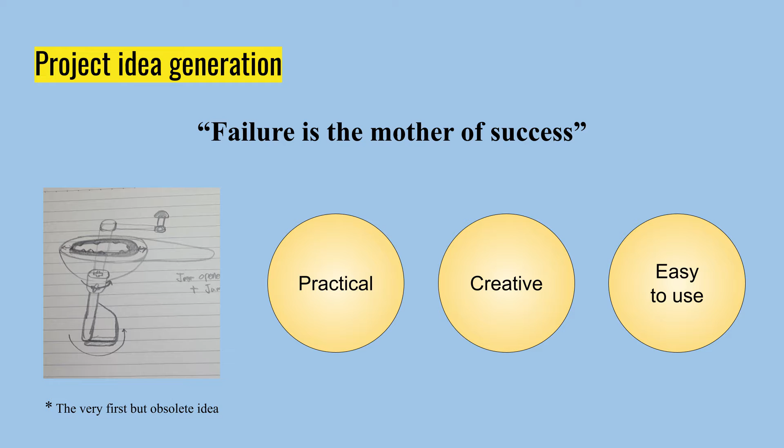Today we are going to show you the final version of our sensational item. Like the famous saying in the slide, we've learned 3 important lessons from the first try. The product should be not only useful but creative to attract people's interest and end up with the purchase. Also, it is best to invent new items which are easy to use in daily life. We assessed that the first presentation in the logo contest was a great turning point for us to improve our project to a much better item.

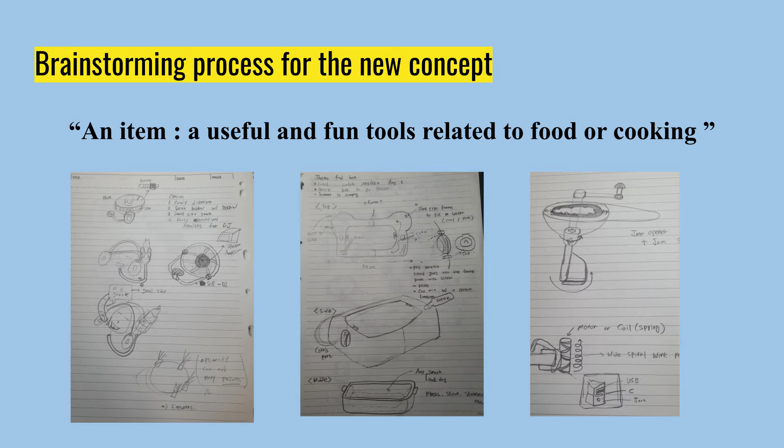In order to create the initial concept of the project, we narrowed down the common subject as to design useful and fun tools related to food. And then we had brainstorming without any limitations to generate as many ideas as we can. There are some interesting productions in the slides, as you can see. The final decision was a cooking multi-tool like you can see in the picture on the left side.

During the decision-making process, we had another discussion about what product will be the final concept among many creative ideas. So we made a few metrics to narrow down the top 5 ideas and evaluated each item. Using a few metrics really helped us to make the logical and reasonable decision.

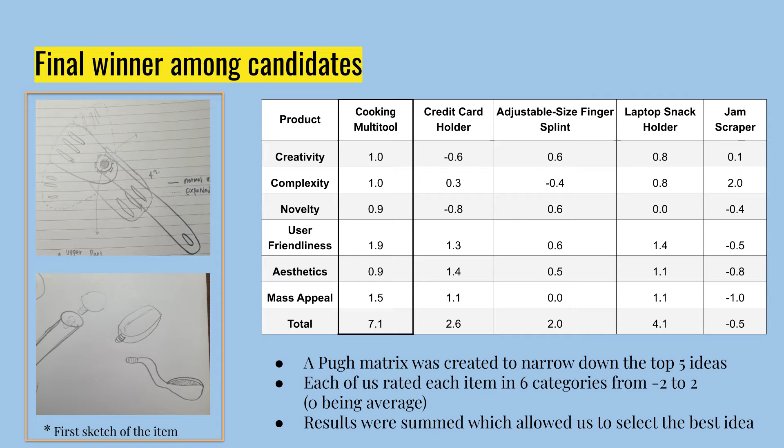The idea about the multi-tool was motivated by 2 stories. The first one is that one of my friends always had difficulty flipping heavy or large and wide food on the frying pan, like omelets and pancakes, with a normal spatula. From this, we thought about the changeable size of the spatula.

The second one is that sometimes moms or chefs need to cook many dishes at the same time, which makes them hectic. So an interchangeable handle that has multiple tools in one rod saves space and helps users not to waste time finding the tools they need. That's how we were able to come up with the concept of the multi-tool.

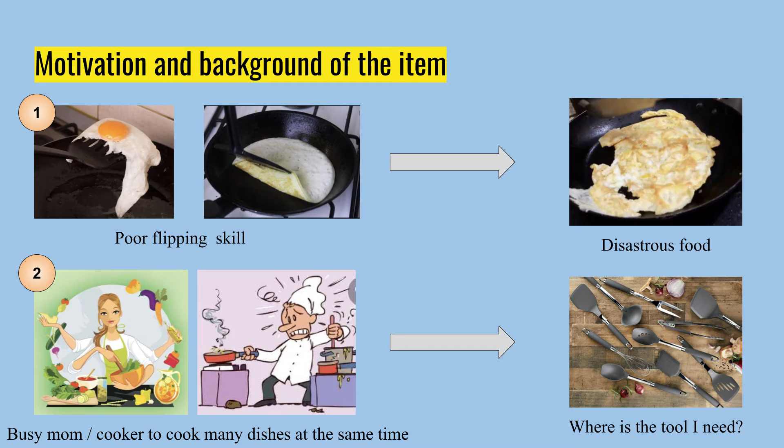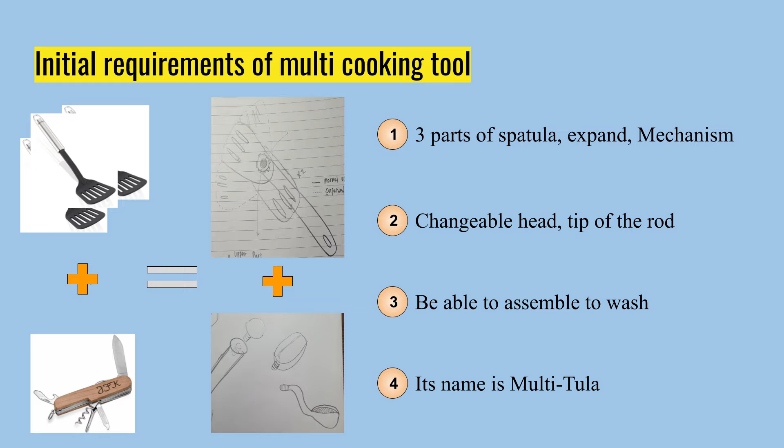Before we jump into the real CAD design, we made some requirements for our item. The spatula functioning part should be expandable to have a wide surface mode, which is operated by a certain mechanism, and the rod needs to be designed to attach other cooking tools. Also, to make the tool washable, it should be assembled with some other parts. Lastly, we named the tool Multi-Tula.

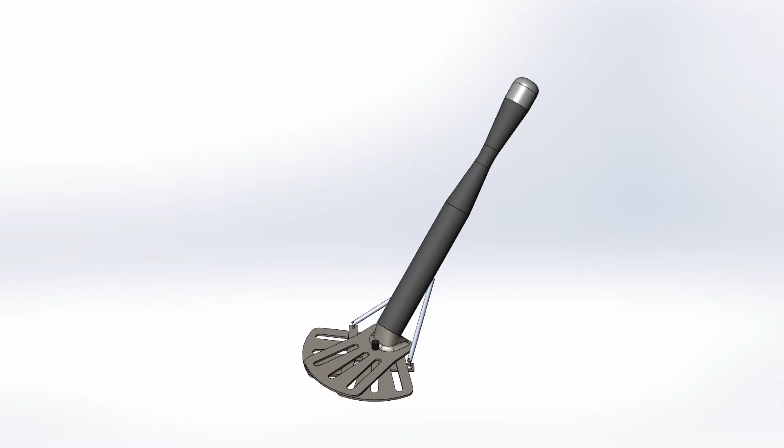Going into this project, there were a lot of ideas that had to be realized. Our main design goals were to create utensils that saved space by using an interchangeable handle. We decided to make 2 tools. One was a spatula that had the ability to change its size, and one was a spoon with holes in it. Additionally, caps were created to protect the threads on the handle when they're not in use. Our design consisted of distinct sections: the handle, the 2 caps, the slotted spoon, and the spatula, which was the most complicated part by far.

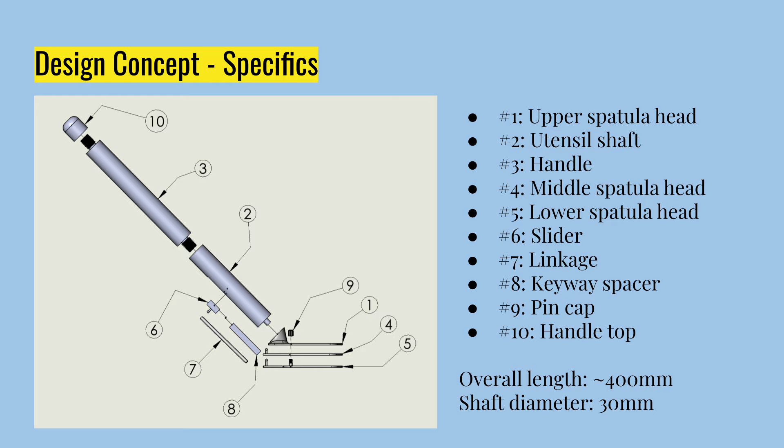This figure shows the parts making up the spatula in an exploded state. We have the upper spatula head, the utensil shaft, the middle spatula head, the lower spatula head, the slider, the linkages, the keyway spacer, and the pin cap. Part 3 is the handle, and Part 10 is the handle top, but these were designed after the first printing cycle. Now we will discuss the functionality of each part.

The shaft is 30 mm in diameter and 150 mm in length. It has a long keyway running through the center where the slider and the keyway spacer sit. The top end of the shaft has a female thread where the handle screws into it. On the opposite end, there are two pins that are press fit into the upper spatula head.

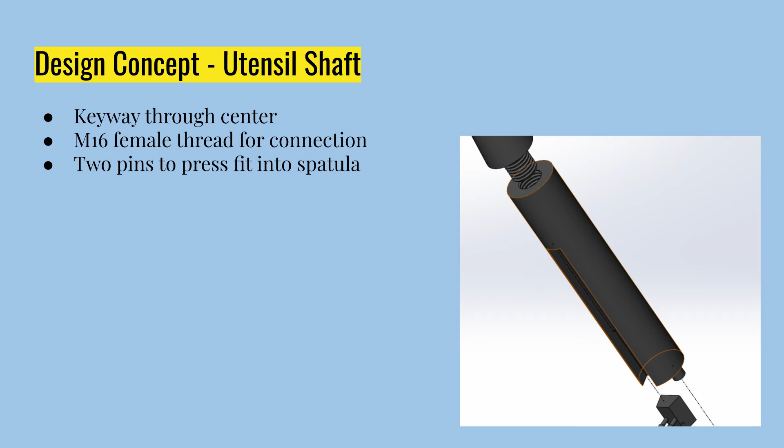As for the spatula itself, the profile of all three spatula heads are the same. They are about 80 millimeters wide and 100 millimeters long. The upper spatula has a lofted feature that connects to the shaft with two holes on the top. The lower spatula head has a 10 millimeter long pin at its center with an M5 thread on top. This pin goes through holes in the two other spatula heads and they rotate around it.

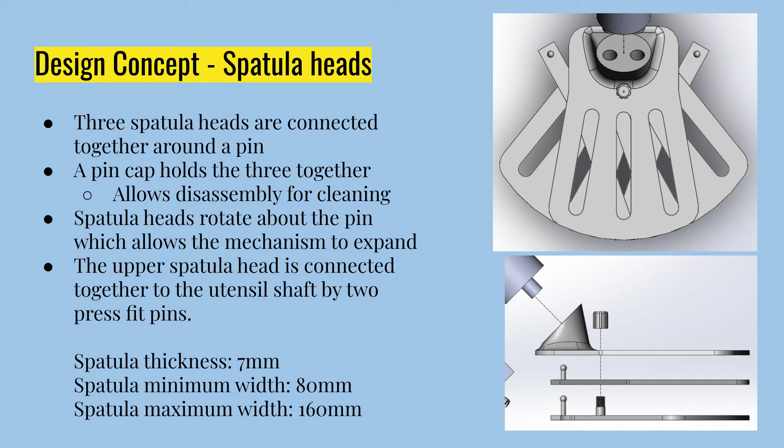All three spatula heads stay together by a nut that threads onto the pin on the bottom spatula head, which can be removed, allowing for the separation of the spatula heads for cleaning. The expansion of the spatula is accomplished by a set of two identical 4-bar linkages. The slider fits into the keyway in the spatula shaft and slides up and down.

The slider is connected to a ball and socket joint on the linkage, which is a long cylinder with two sockets at the end. The opposite side of the linkage connects to the spatula heads, again with a ball and socket joint. The spatula heads rotate around the center pin. Overall, this system causes the spatula to expand to twice its size when the slider is moved down and to contract when the slider is moved up.

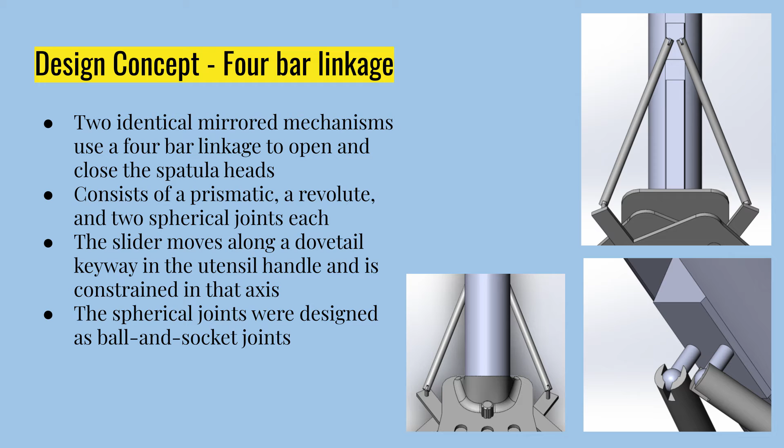Now that we've had a chance to talk to you about the design process and the individual mechanisms developed during each print cycle, I'd like to take a moment to elaborate on the quality of those cycles. As we discussed in our last presentation, during the first print cycle we focused mainly on the fanning spatula of the multi-tooler. It was during this cycle that we printed the utensil shaft of the handle, the three spatula heads, the pin cap, and the slider with its linkages.

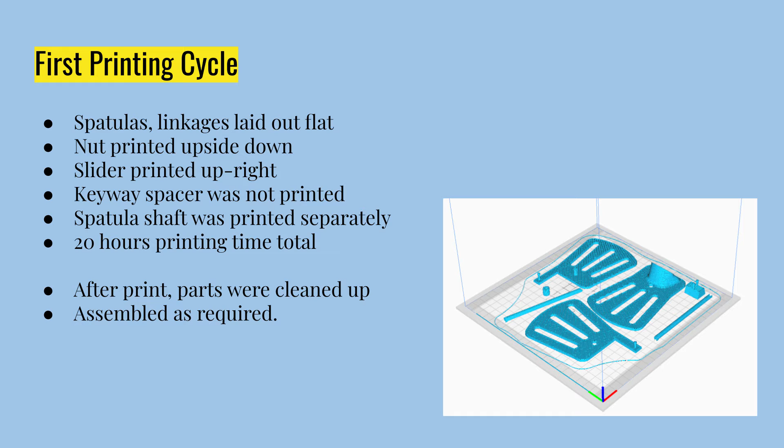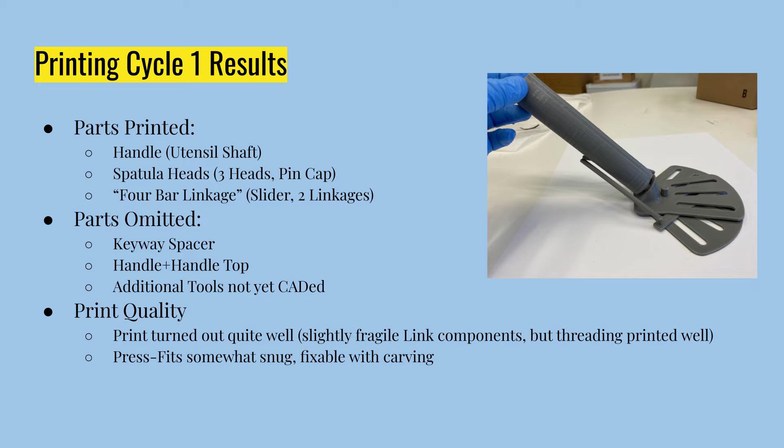However, we had to omit the keyway spacer, the handle plus its handle top, and a few additional tools that we've not CADed yet. The quality of this print was pretty good, but we found that the link components were quite fragile, while we were very, very impressed with the quality of the threading. One other note that we had about the quality of this print cycle was that the press fits were a little bit snug, but this was fixable with carving.

Because of the general success of the first cycle, we decided to print our missing parts for the second cycle, which are the spoon, handle, and cap. The handle is 130 millimeters long and has a 30 millimeter maximum diameter, matching the diameter of the spatula shaft, but thins out to 18 millimeters, which makes the handle look more aesthetically pleasing and gives a better grip. On each end of the handle, there are two M16 male threads that connect to the utensil shafts and the caps.

The slotted spoon was split in two parts. The spoon itself is 90 millimeters in diameter and 20 millimeters deep, and has an extruded section where two holes are located corresponding to the pins on the spoon shaft, which are pressed into the spoon to create a permanent bond. The shaft widens into a circle where a female M16 thread allows connection to the handle.

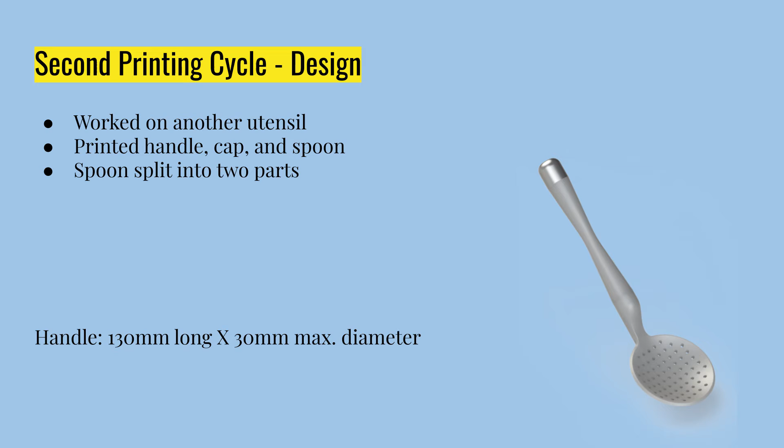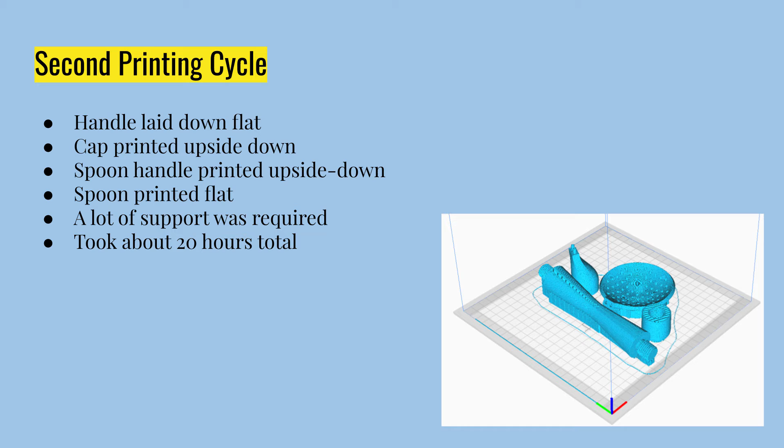Moving on to the second print cycle, it was here that we focused on the handle and a couple of additional tools for the multi-tooler. During this cycle, we were able to print the remaining portion of the handle top, the hanger variant of the handle top, and a strainer spoon tool.

However, we still chose to omit the keyway spacer, and we were unable to print some additional tools such as the iris mechanism due to integration troubles. The quality of this print cycle was slightly less exciting than the quality of our first print cycle, but still turned out quite well. We noticed again that there were a few fragility issues, but we think that this would be changed with something that will be mentioned in future works.

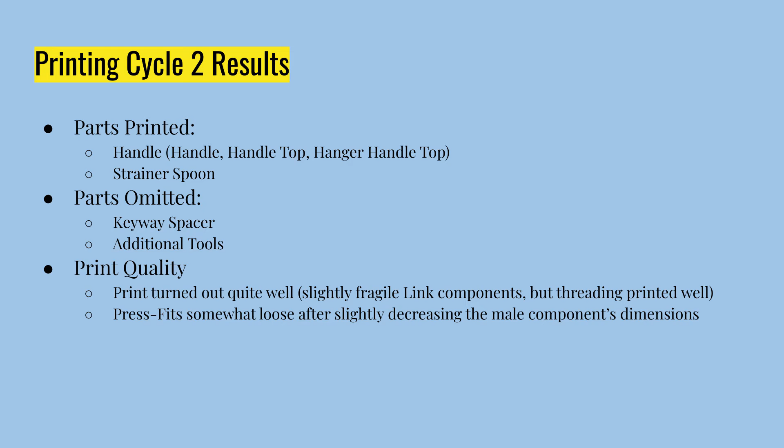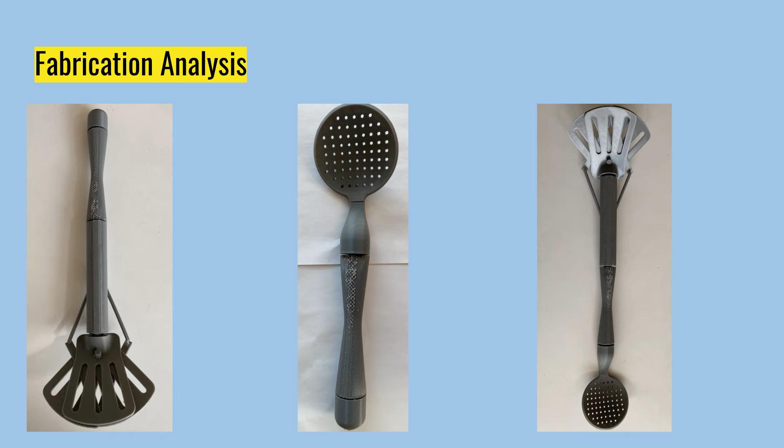The overall results seem promising. When using the tool, we noted the spatula heads and the spoon were strong enough to lift objects such as a heavy wallet. The handle was the ideal size for gripping. However, there were slight detail problems with the design. The main problem of the design was the weakness of the ball and socket joints that connect the link to the spatula heads, as they were too weak to perform the expansion mechanism we intended.

Also, the slider wasn't as smooth as expected, which resulted in applying more force to move the slider, which then caused the ball socket joint to disconnect. When trying to use the slider mechanism, the ball socket joints came off and the spatula did not expand. Additionally, the press fit that connects the spoon to the handle was not strong enough, such that when held vertically, the spoon came off very easily.

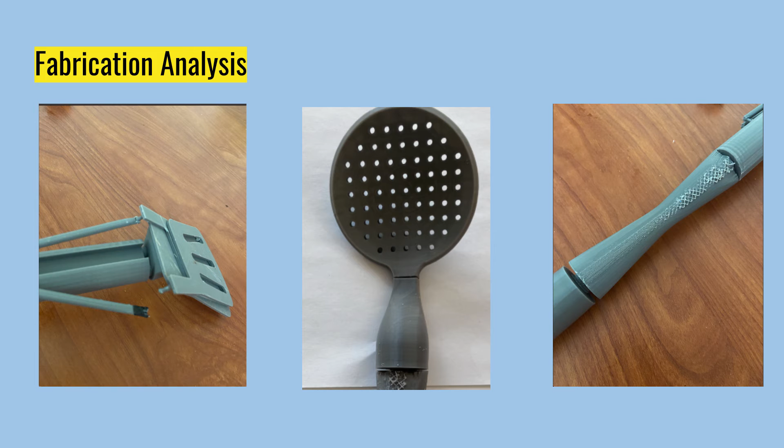We conducted a survey of potential customers. 92.3% said they cook at least once a week. Only 56% felt comfortable using a 3D printed device to cook. 32% said they would use this device daily, 40% said weekly, 16% said monthly. 4% said they would use this occasionally for outside barbecue, and only 4% said they would still be hesitant to use the product. We gave out a range of prices they would pay for the product.

The most popular price range was $10 to $15 with 46.2%. This seemed valid because when we conducted research on existing products, we found out that most of the spatulas on Amazon are around $9 to $14. With our product being more functional than existing products, we think that the price is very reasonable.

Most of the apprehensions were about the materials used for 3D printing. They were worried that the material would not be resistant to heat or whether it's BPA free. Also, they had concerns about the vulnerability. They wondered if the spatula is strong enough to work well. Lastly, they had questions about the mechanism itself, but we think that this is caused by a lack of explanation about the mechanism in our questionnaires.

The last part of the questionnaire was to provide any comments about the product. They said if the spatula could rotate 360 degrees, it would make the product more appealing. They also talked about making the handle part more ergonomic, and about the product being more aesthetically pleasing. And lastly, some people said the product could be better if it was just one spatula head instead of the three.

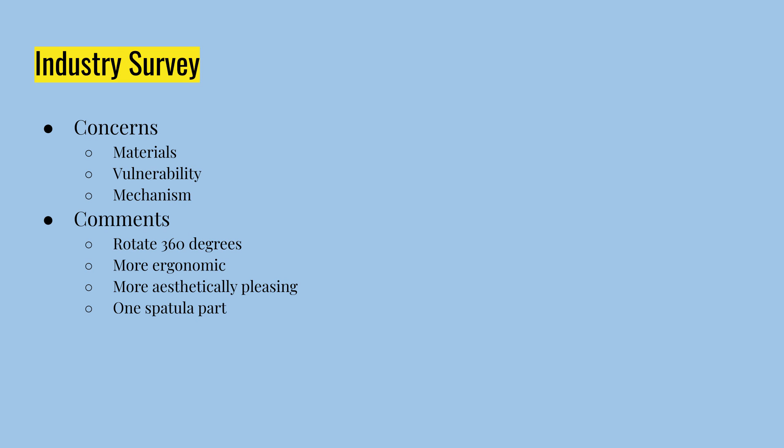We conducted interviews with our parents since they are usually the ones that spend the most time cooking. We asked similar questions to the questionnaires. When they first saw the product, they were more skeptical than optimistic.

They weren't sure if the product was strong enough to actually be used as a spatula. Another skepticism came from the angle between the handle and the spatula head. The angle might not allow the food to flip. They were also worried about cleaning the product after its use, as it might be a burden to detach the parts to clean.

One of the improvements they suggested was having a button with a motor or a spring that will allow the food to flip automatically. However, they pointed out that cooking utensils should not be too complicated. We also introduced the idea of detaching the spatula head from another cooking utensil such as a spoon or an iris mechanism for pasta measurements, which they were satisfied with. They say they would buy this product depending on how many utensils were included.

Now that we've had a chance to show you the work that has gone into our project over the course of this last quarter, I'd like to take a moment to give a brief teamwork analysis, a little summary of how we functioned as a team. To break down the work distribution, we designed the device as a unit, but had individual team members complete separate mechanisms in SOLIDWORKS. Then, the teammate most experienced in SOLIDWORKS would edit these components, combine them into an assembly, and give us instruction on how he did so and tips to improve our CAD skills. We found this to be timely, effective, and very conducive to learning.

The report would then be broken down by parts CADed and willingness to take on extra slides or work. We felt that our team functioned very well together and was able to create a pride-worthy device despite having switched products early on. We worked together very democratically throughout this project, often using Pugh matrices to make design decisions.

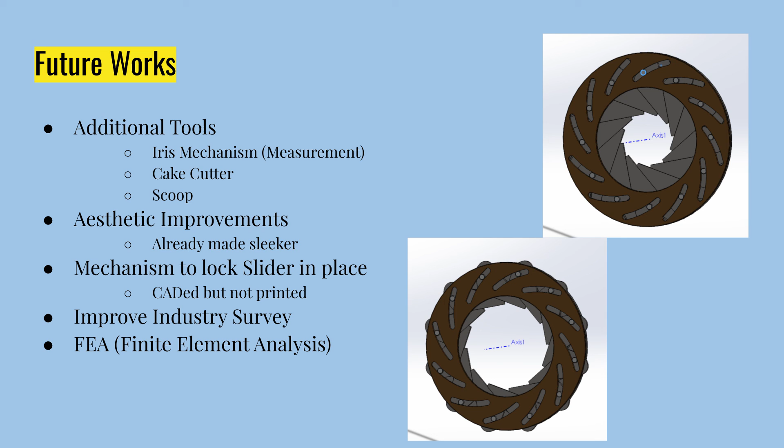Given the feedback we received and the problems we faced with our print, we decided to make a few changes to our design. One of the major problems was that the ball and socket joints were not strong enough, therefore the diameters were all enlarged. Some of the feedback we took into account for the redesign were the overall aesthetics and ease of use. The design was modified to have a crescent-shaped cross-section with the size of 20 by 12 millimeters. This way, the handle is more ergonomic and looks better.

To make the product easier to use, the threads on the handle were completely removed in place of a pin, which holds the handle on the utensil shafts. Finally, a pin is now used to lock the slider in place.

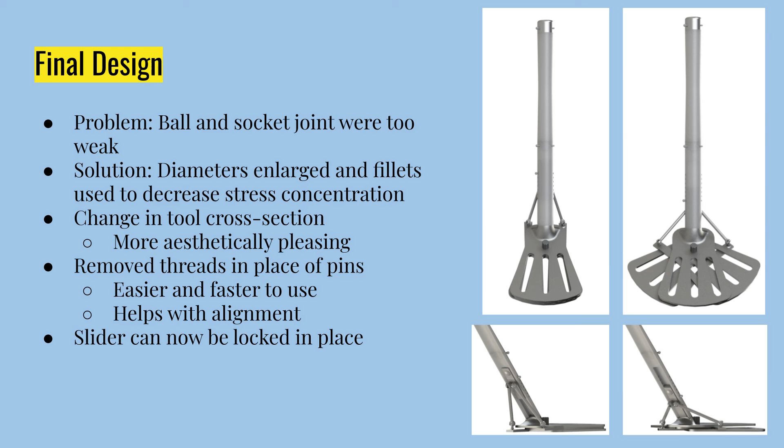To end off our presentation, let's talk about some eventual goals for the multi-tooler. We believe that the perfect multi-tooler would have a metal composition, both to eliminate fragility issues without altering too many dimensions, and to eliminate the food safety concerns posed by the use of ABS. Our hope would be that this product could continually release new components for the multi-tooler's back end. This could be done through a subscription service or be bundled with existing cooking subscription services like Blue Apron. We would also want future prints to be done with a sleeker, altered design.